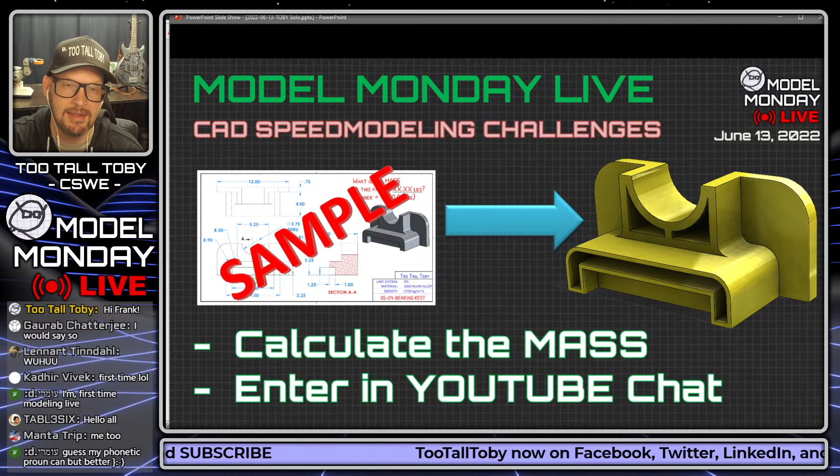I mean, the basic rules are that you can use any CAD package out there. As long as that CAD package can input density and give you a calculation for mass, you're good to go. You want to make sure that when you're doing these challenges, you use the specified precision that's on the prints. And the first person to enter their answer in the chat is declared the winner.

Now, as far as the material density goes, you'll notice here, these are the three materials we use, and these are the two different unit systems we use. So a lot of times I encourage people to grab a screen capture of this page, just kind of save it off as its own standalone JPEG, and that way you can get back to this in the future.

But really the best thing you can do is make sure you have these materials readily available with the appropriate densities. These are the default densities in the CAD system that I use. But if you're using something different, then you want to make sure that you have these material densities ready to go so that you can just immediately pick the material and begin modeling that design.

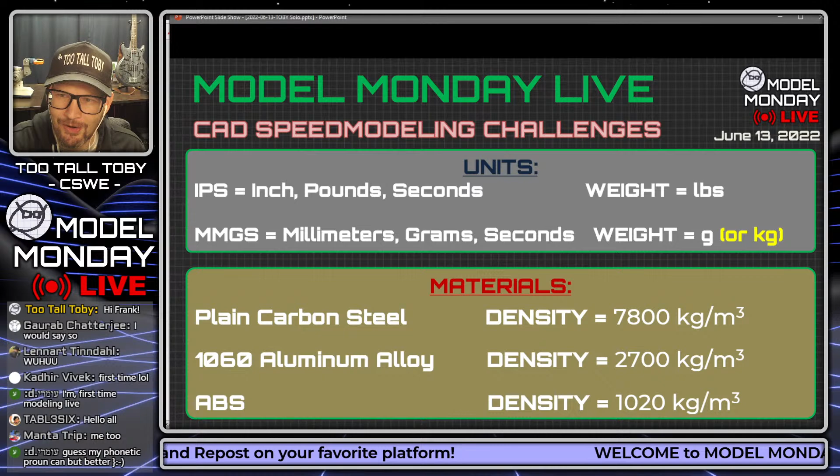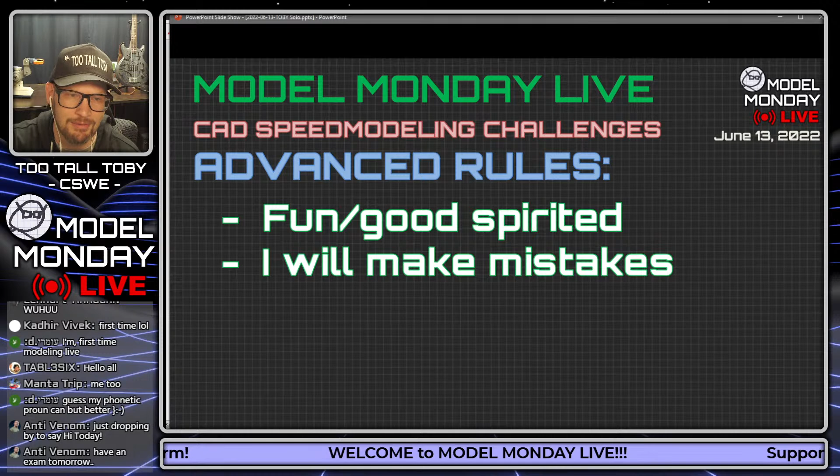As far as advanced rules go, it's really just a reminder that this is meant to be fun and good-spirited. And, of course, that along the way, occasionally I will make a mistake. I'll miss a dimension or something on the print. And if that happens, we'll just call an audible real quick and make sure that we get it resolved. And then finally, in the advanced rules, the Ivan exploit is permitted and is sometimes even encouraged, depending on the model. So we'll keep that in mind as we get into Challenge 1 here.

And so for Challenge 1, what I'm going to do is I'm going to show you this thing in full screen. So I'm going to flip over to a full screen view here. You're going to get your screen capture software ready, whether it's Windows Snipping Tool or Snagit or MW Snap or whatever you're using for screen capture. And as soon as I show this 2D print, we are live. We are going for it.

The challenge is live. And it's up to you guys to come up with the mass of this model. And the first person to do it wins. It's declared the winner. So here we go. In 3, 2, 1, go. So what is the mass of this part? In XXX grams. What is the mass of this part?

And you can see here that in the lower right in the title block, we're looking at this part using millimeters, grams for our measurements and our weight. Where material is ABS, which is a density of 1020 kilograms per cubic meter. And this model, this might be like a 3D printed model, some kind of a hex bracket.

You can see here the geometry, the dimensions on this thing. A little bit tricky. Not super tricky, I don't think, but a little bit tricky. Some things to look out for on this one. Make sure you take note of where your center points are for your different arcs relative to the overall center line of the model. That should definitely help keep you out of trouble a little bit as you're attempting to turn this 2D print into a 3D model.

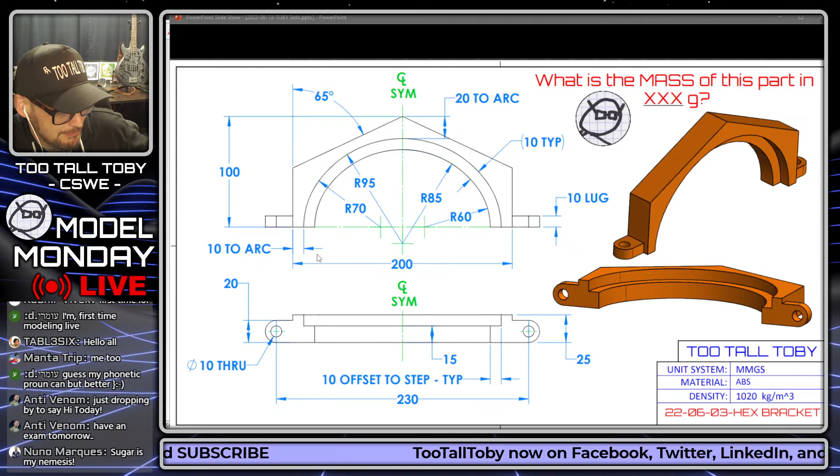It's probably not good that that's how I break my fast, with that sugar in the morning. But Nuno says sugar is my nemesis. Yes, I've fought many battles with sugar over the years, and I think nemesis is the perfect term for that. It's like we just keep going at it. Nobody really ever wins or loses. It's just an infinite battle between me and sugar.

All right guys, let's take a look at some Model Monday solved action here. What I mean is that we post these Model Monday episodes, these live episodes, and people get a chance to watch them afterwards. In this case, there was an episode a few weeks ago, Season 4, Episode 2. I'm going to go through and update all the thumbnails so they say the season and episode, just to make things a little easier when people are browsing.

In Season 4, Episode 2, there was a question that came in. This question actually looks like it came from Omri, who was in the chat today. They asked: is there a tutorial on how to solve the number 3 challenge? The angled side caused me so much trouble. And bro, I hear you on that one. I believe this is the right part - since you're in the chat here today, if this is not the part we're talking about, let me know. But I believe this is the part you were referring to.

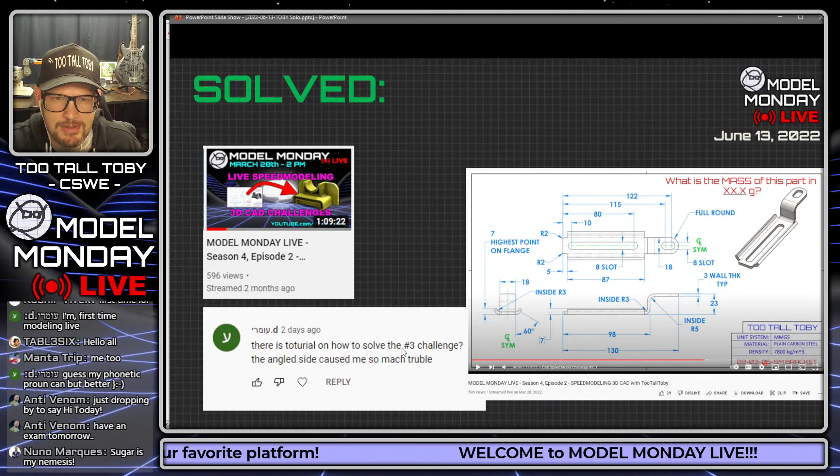That was a bit of a challenge. It could be a sheet metal challenge, it could be a non-sheet metal challenge. It's up to you how you want to tackle this thing. For some people it might be easier to do it not as sheet metal. But yeah, this is kind of a challenging model, so I figured what I could do here is jump over to our Model Monday solved mode, which means we'll be turning on the keyboard cam today.

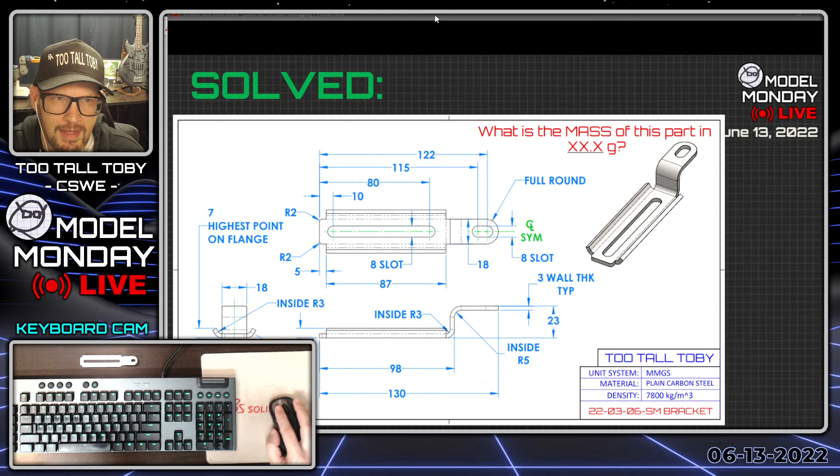You guys can get a look at this keyboard and mouse setup that I have - very high-tech and fancy. And we can talk a little bit about this sheet metal bracket, SM bracket, that we did a few weeks ago on Model Monday Live. So let me bring up our CAD program of choice today, SOLIDWORKS 2020. Let's get into this and see what it's like to take on a challenge like this model here, this sheet metal bracket looking model.

Just like what you guys do during the live stream, what I'll do is grab a screen capture of this - maybe the important stuff here, material density, and there we go. That looks pretty good. Then I'll move that over onto my second screen so I can continue to reference it as we're going through and creating this model here.

And then when it comes to the model itself, I think I'm going to do this as sheet metal. So I'm going to go new, and I'll pick a template that is in the correct unit system and with the correct materials.

So this is plain carbon steel.

When it comes to modeling a part like this—really when it comes to modeling any part, regardless of what CAD system you're working in—you have to come up with a plan to begin with. In this case, I think what I would do is choose to create this profile first: over, up, and over.

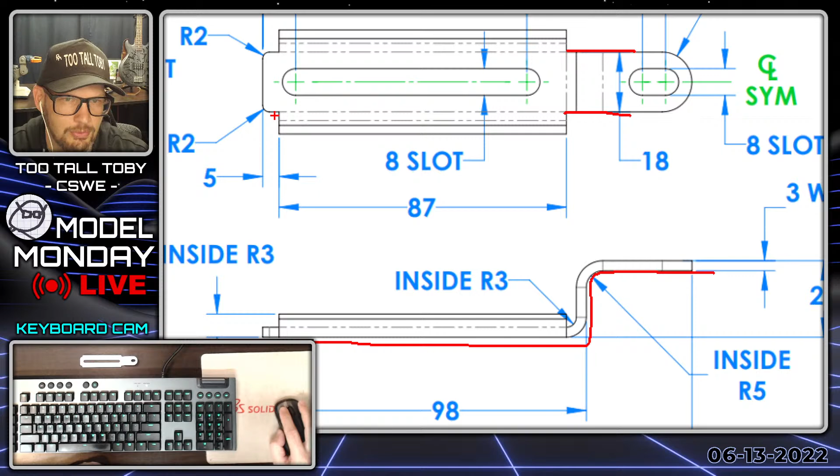When we're doing 3D CAD, it doesn't matter what CAD system you're in. You're always trying to come up with a couple of things right at the start of the design. Number one, what's the starting plane, starting profile going to be? And number two, which kind of goes hand in hand with that—

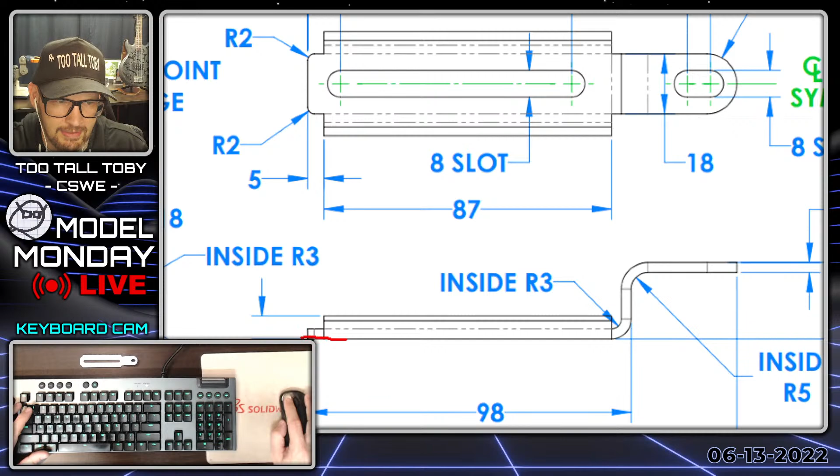What's the first feature going to look like? The base feature—like when I go from sketch to feature mode for the very first time, what am I going to end up with? In the case of this model, I'm going to end up with something that looks like these two views combined together. It's going to come over, up, over as my sketch, and then I'm going to use that to create this geometry. It'll be straight, but it'll be this geometry here. That's going to be what my first feature looks like.

So that means my starting plane is going to be the center plane running through that model—basically this plane here. We always want to ask ourselves, where are we going to start our very first sketch? What's our first sketch going to look like? What's our first feature going to look like after we take that sketch and turn it into a solid feature?

Sometimes it's a loft, sometimes it's a sweep, sometimes it's sheet metal. We have to use our best judgment and our experience in CAD to determine what that's going to be. But that's always the first thing you want to think about: what's my starting plane and my starting profile? Those two things go hand in hand, right?

Because you're going to create your starting profile, which is your first sketch, on your starting plane. What the starting plane also helps you establish is how the model is going to be located relative to the origin. And it leads you into the next question: does the model have symmetry?

Because if the model has symmetry, that really helps you figure out where the first sketch should be located—right in the middle of the part. It can also save you time, because if you can just model half of the model and then mirror it at the end, that's going to save you a lot of time. These are all things we think about, and again, it doesn't matter what CAD system you're working in. I'm working in SolidWorks today, but these same tips and tricks are applicable to all CAD systems.

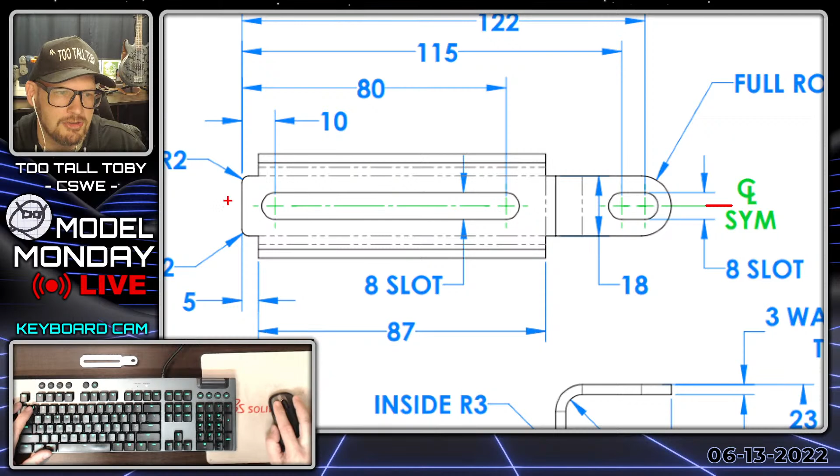So: starting plane, starting profile, is the model symmetric? A lot of times on the drawing it'll tell you it's symmetric. Even if the model isn't fully symmetric, a lot of times you can see there's partial symmetry to a certain point in the feature tree. So you know you can model half of it, mirror it, and then make additional changes that turn the model into an asymmetric challenge. But maybe it starts out symmetric, so you can save time—or at least intelligently decide where your origin is going to be. In this case, I'll probably put my origin here.

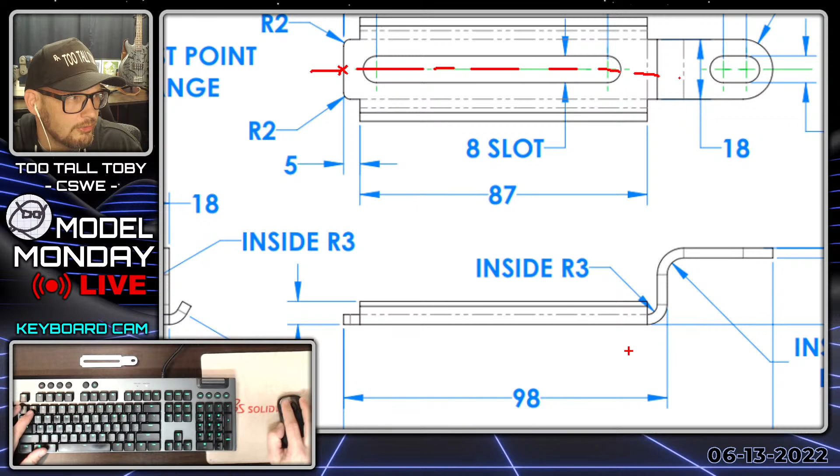It's definitely going to be along this center line here. I don't know if it's necessary that it's there, or it could be, so in this case, that's going to leave my origin down here in this corner. Could also maybe be up here in this location.

Usually what I try to do is have everything going to one side of the top plane if the model's not symmetric about the top plane. That's probably why I would opt for that location instead of this location. But there may be other questions that come into play when you're deciding where your origin is. Those are the things I think about when I'm going to get started with a design.

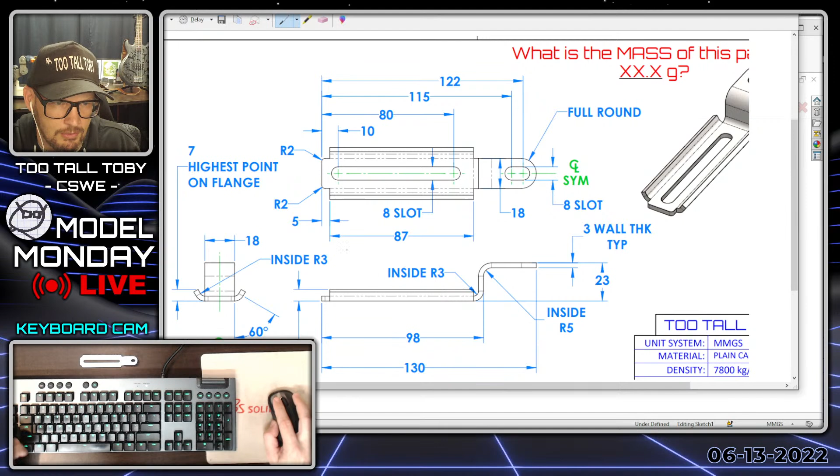I think I've talked enough about that, so let's get into it here. I'm going to go to the right plane because a lot of times I just try to model the same way that it's drawn. So it looks like in this case the drawing has the geometry that I've already identified as the starting geometry, meaning this geometry here. This looks like it's on the right plane, so right.

This over here is going to be the front, and then the top up here. All right, so that's how I'm going to start out. So now I know my starting profile, and my starting plane. I was trying to say starting location, I think, and I combined the two.

So now I'm going to utilize auto dimensioning. As soon as I begin sketching, I can immediately enter a dimension, and now that geometry is fully defined. I'm going to create some additional auto dimensioning here. So this is 23 to the top, and the wall thickness is 3.

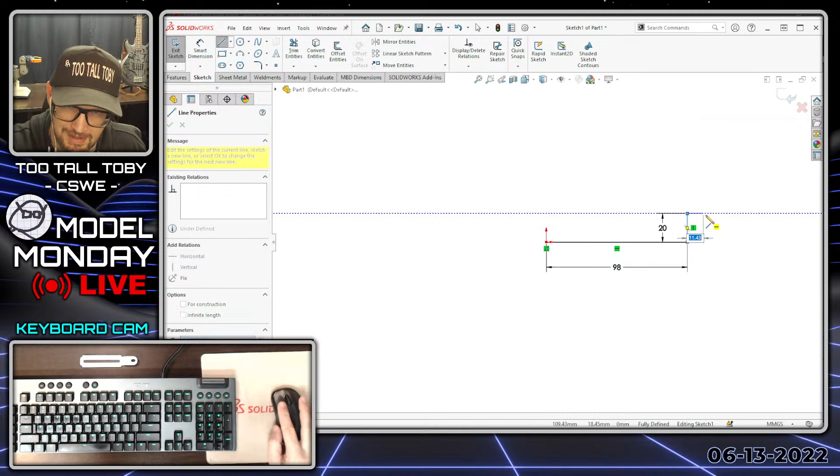So I could type in 23 minus 3, or I could just do it in my head. I can actually figure that one out in my head, no problem. Very proud of my math skills today. So I'm going to go here to this final dimension, and we're going to make that 130.

And that's how we create the geometry for this first setup here. So you can see it comes over 98, it goes up, comes over, this is our 130, and then this is our 23 minus 3, because that 23 is going to the very top.

Okay, so now let's turn that into a sheet metal feature. So we go features, and we go sheet metal. These tabs up top here, we go sheet metal, base flange tab, and we're ready to turn this thing into a sheet metal design.

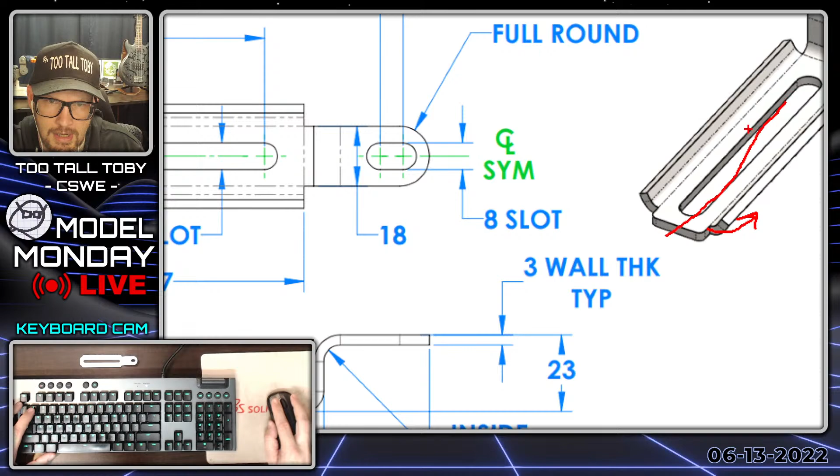In this case, because the model is symmetric, and because it's got this kind of funky flange sticking out here that I really don't know how I'm going to handle yet, I just know that it's going to be tricky. Because of those two reasons, I think what I'm going to do is choose to just model half of it, and then I'll mirror it over to this side when I'm done.

So that means I'm going to take my 18 dimension that I identified earlier, and I'm going to cut that in half. You can do that right in this dialog box here — you can go 18 over 2. That way, if you can't figure that out on your own, you can just let the software do it for you.

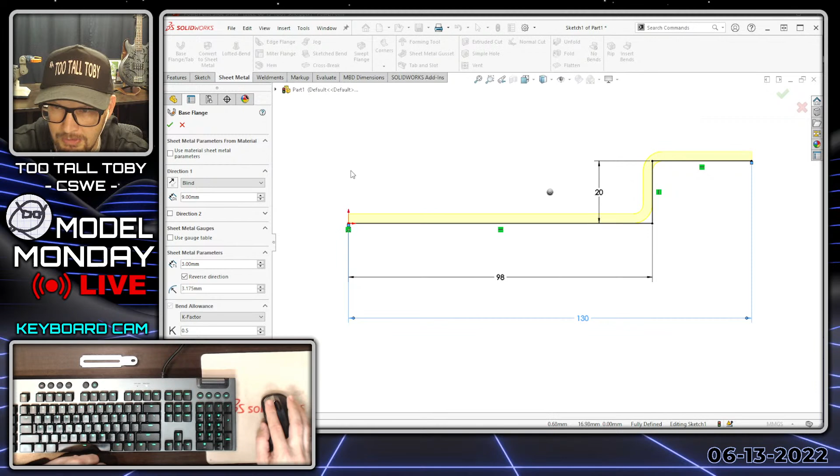Now, this is kind of like a thin feature in the sense that it's not extruding as a thick model, but I need to declare what the wall thickness is. So the wall thickness here is going to be 3 millimeters, and it's going to be on the other side of the design because of the drawing. Because, like I said earlier, a lot of times I like, for consistency, to have everything on one side of the origin, at least in the beginning.

And then it looks like the bend radius is 3 everywhere except for one spot. This is kind of a weird scenario here. I wanted to show you guys that I have the physical part, but you can see that we've got a bend radius here of 3 and then a bend radius of 5.

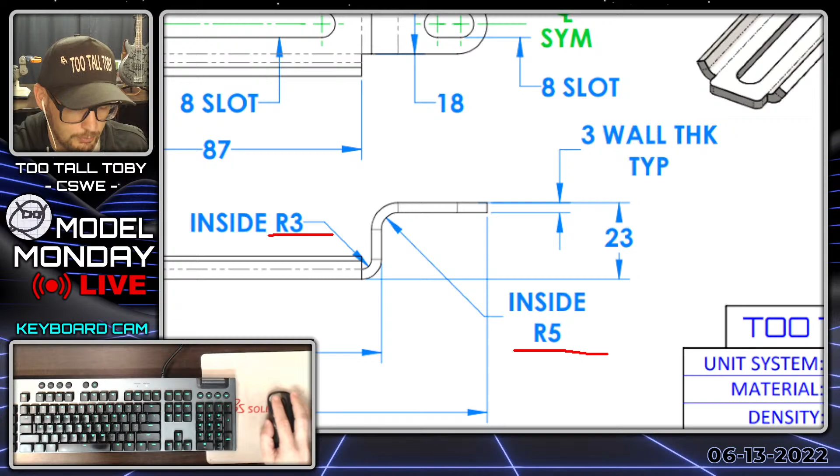I'll hold this up to the keyboard cam a little bit so you can see it... oops, sorry guys, I forget that the camera's a little weird. But it does have this wall — this radius here is like greater than the other radius. So let me switch back to my regular webcam. There we go.

See, there's a pretty obvious difference between those two radii—one's much larger than the other. I thought that was kind of unusual. You don't usually see that in sheet metal; it's usually pretty consistent, but this model was a little unique, and that's part of why I thought it would be a good example here.

So I'm going to set the default bend radius to 3 here and hit the green check mark, then immediately go into that base flange, and notice there are 2 different bends that were created when I made that base flange.

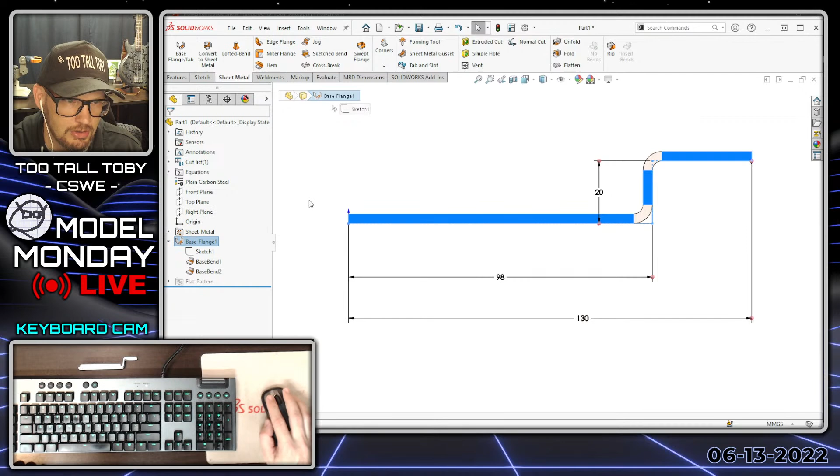In SolidWorks, you can actually modify the radius for any bend created when you make a sheet metal feature. So I can go to this bend here and select edit feature.

Then I can say I don't want to use the default bend radius, and change it to 5. So I found the bend in the feature, unchecked this box, and input my new value for the bend radius. That's how you do that.

We hit the green check mark, and now if we click on this face here and look down in the status bar, we can see that the radius of that bend is now 5 millimeters. That's excellent, that's what we wanted.

For a quick sanity check, we can pick on this other face, and see that the radius of that bend is 3 millimeters. So, we got what we wanted there—non-uniform bend radii in a sheet metal challenge. Good stuff.

Now as far as this rear section goes, we've got a full round here on the very rear. I'll probably end up saving that for the end of the model after I do the mirror, because it's easy to rip in a full round fillet if you have all 3 faces.

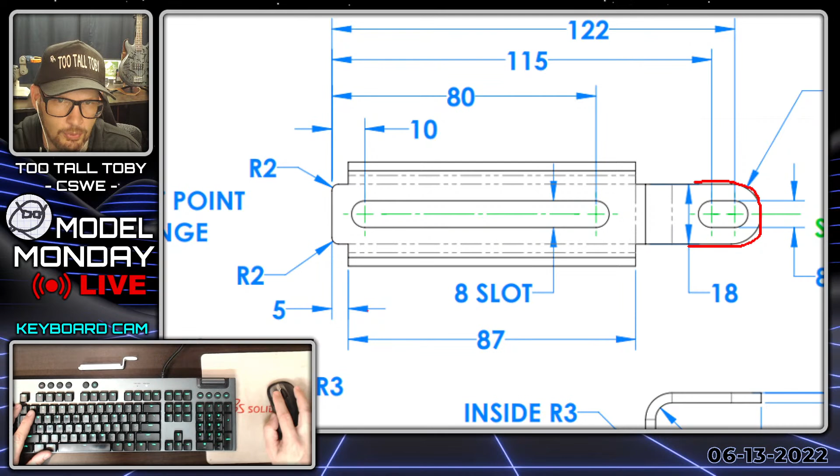Right now we only have 2, because the model's cut in half, so I'll save that full round for the end.

And the slot—a lot of times I save my cut extrudes for the end as well. This is just establishing a consistent workflow. When you're working in 3D CAD, you want to get in the habit of doing things the same way over and over again.

Don't just randomly do things—it'll make it much easier for you and your coworkers to visualize and edit your models if they get your models. So I'm going to save those cut extrudes for the end.

So I guess that means I'm basically ready now to move on to this kind of weird section here, where we're trying to create this bend that comes up at an angle, going up to 7 millimeters at the highest point. It's a very strange way of defining a sheet metal design, or really any design.

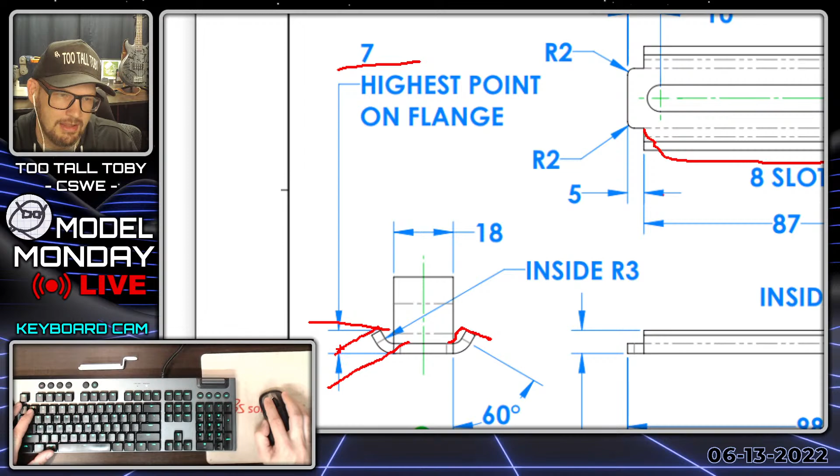You wouldn't normally see that—usually you'd see more of a flange length, but it's what the customer needs, and what the customer needs is what we try to provide. That's why we do these things.

So let's get in here now. We're going to create an edge flange, and whenever you do an edge flange in SolidWorks, there's some important information you need to know about. I click edge flange here, and the first thing that's very important to know about is the idea of what's called flange position.

This is down here in the flange definition. You come down to the flange definition section, and there's a part that says flange position. There are mainly 3 different flange positions.

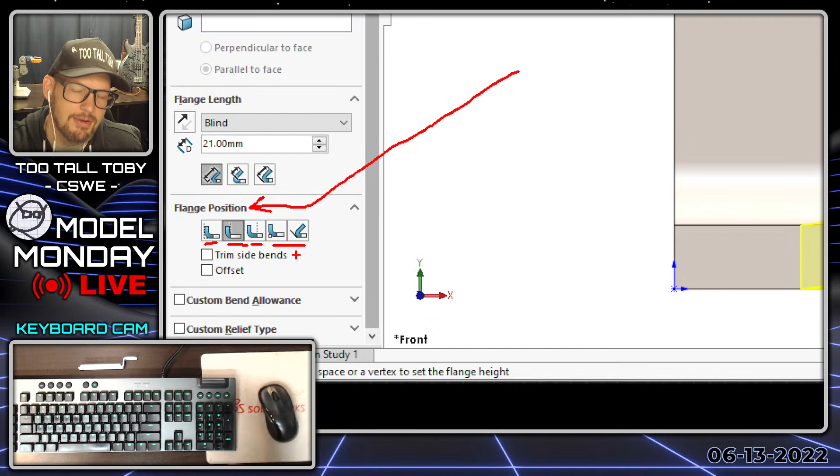There are 2 more on the end here, but they're not as important unless you're doing non-90 degree bends. Now, I realize we are doing a non-90 degree bend here, but for today's example, let's just ignore these last 2.

Let's just focus on these first 3, because these are the more common cases you run into. And what we've got here, you can actually kind of see it in the illustration of the icon.

We've got this guy here, which means bend the material so that it is inside—so it's the same location as the original material from the solid flange that you're creating the edge flange coming off of.

So here's what I mean by that. If we look at this model and go to this first option, we can see that the original solid geometry came over and came up here, and the edge flange is right up against that—nice and flush right up against that.

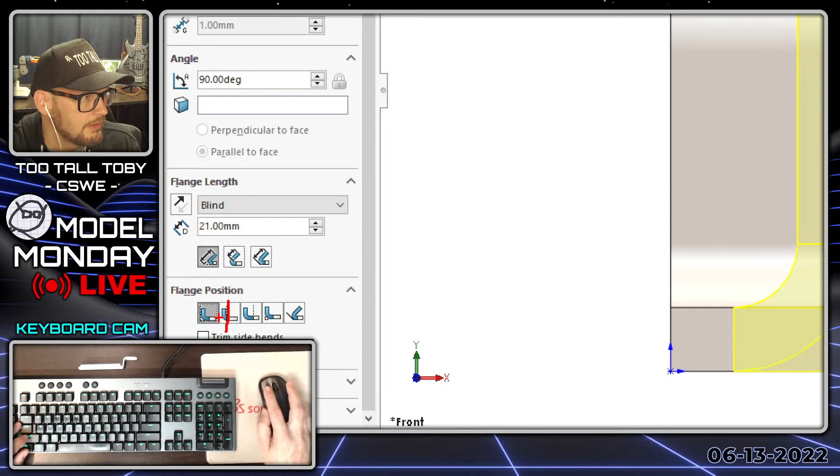The second button here means that we're still looking for where that original geometry is, but this time we're going to put 1 material thickness to the outside. So if I choose that second button, you can see what the result is here. We get 1 material thickness to the outside. And then the third button, I'm just going to minimize the flange parameter so you can see how it changes.

What the third button does is it bends the flange beginning at a tangency point, which is exactly where the existing solid material is. So depending on how the print is dimensioned, or depending what the customer gave to you, you have to figure out what the appropriate flange position is. And it kind of depends on what you're building.

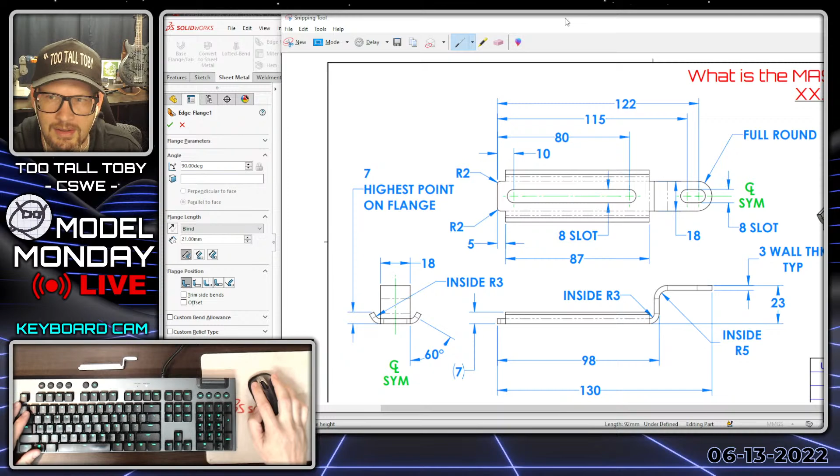Like if you're building an electronics enclosure, a lot of times you get the overall dimensions instead of the inside material dimensions or anything like that. So it just kind of depends on the market that you're in and who created the drawing. There's a lot of things that it depends on. But in our case, we can see here that the view from the front is showing that the flanges are starting where the existing material ends.

So we're going to choose that third option because that's what the customer gave us, and we can see that now the flange begins here where the material ends. It's exactly what we want. And then in the flange command itself, you do have the ability to specify an angle. So we could say that we want to specify an angle here of 60 degrees.

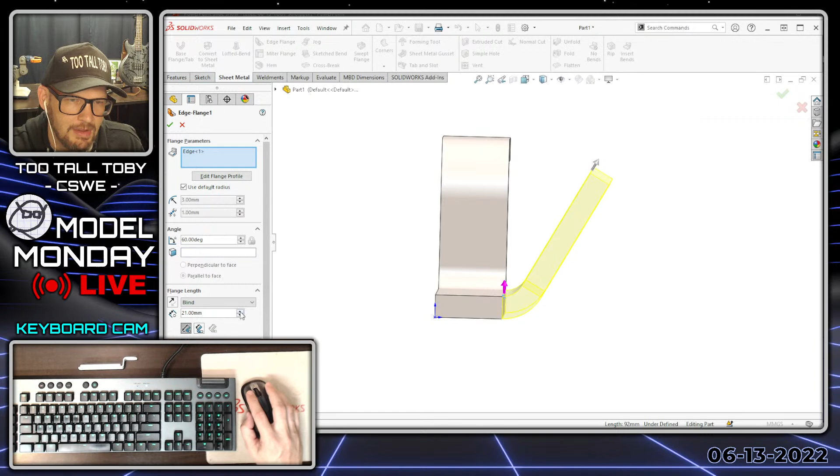Okay, so that's what the customer is giving us, that angle at 60 degrees. So we're going to specify that same angle here on our flange. Now the final challenge is trying to figure out how to end the flange. There are some clever ways of saying we want this length to be a certain distance from the original location. But unfortunately, it doesn't really seem like any of those options are going to help us in what we're doing here.

So I think in this spot, I might just opt to do it with two different features. So I might just opt to create the flange that's sticking out there a very long distance. There's a lot of different ways you could do this cut, right? But I might do something like convert, and then just pull this endpoint off here, create another line here, which is perpendicular, and then just merge these points together.

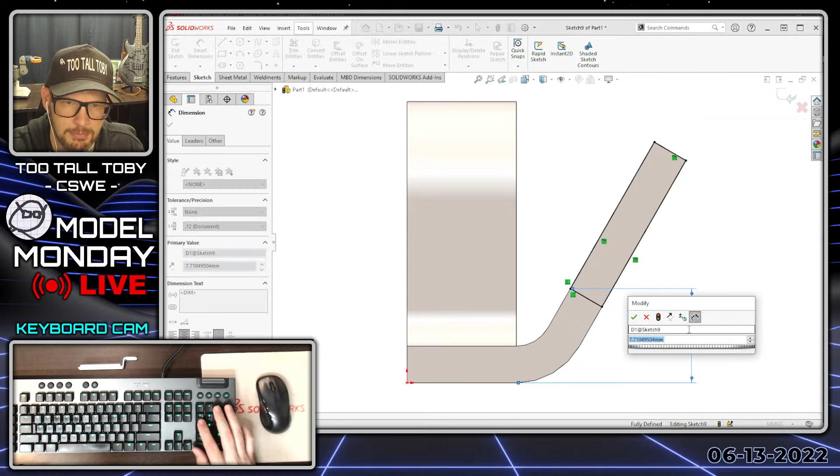And so what that lets me do is very easily implement the customer's design intent, the 7 millimeters to the highest possible point, without having to come up with some weird solution using offset from a point or anything like that. If you just go in there and do it with brute force, you can still create a model that's resilient, a model that's going to stand up to changes. And you can see here that gives us exactly what the customer's asking for.

So now I'm going to do S key Extruded Cut. This option here for normal cut probably doesn't matter if you have it turned on or off. Let's see if it gives me any flack if I turn it either way. Yeah, it doesn't matter in this case. It's a way of making sure that when you create that cut, you always get your geometry perpendicular to the material so that you can just do a normal punch through the material in the flat. A little bit advanced, it's kind of a sheet metal subject.

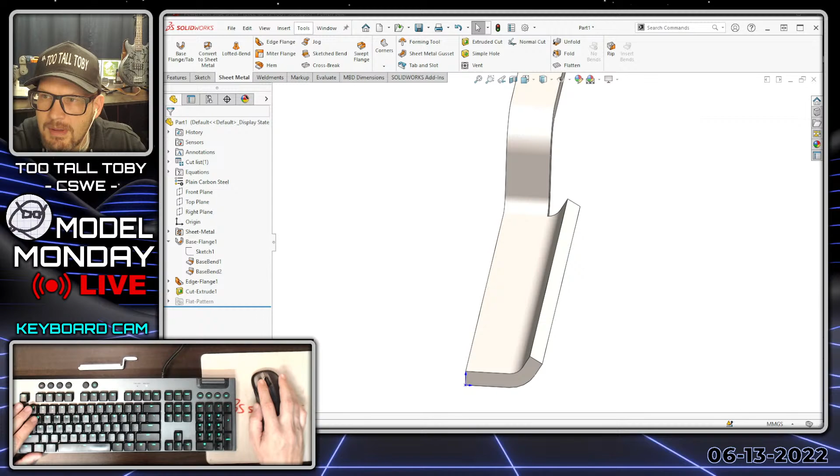And then I did miss one thing. I didn't want to talk about too many things at once, but the other thing that we need to do here is create a modification to the flange so that the flange doesn't go the full length, right? We end up 5 millimeters here in front of the flange when we're creating that flange geometry. So no problem. We'll just go edit feature here on the flange.

We'll say edit flange profile, and we can actually just grab this leg here and drag it in a little bit, and then say that we want that to come in 5 millimeters. And then as far as creating your models so that they can withstand changes, maybe you'd want to put a dimension on here. Let's say we want to make that dimension 25 millimeters just so that we know that it's enough.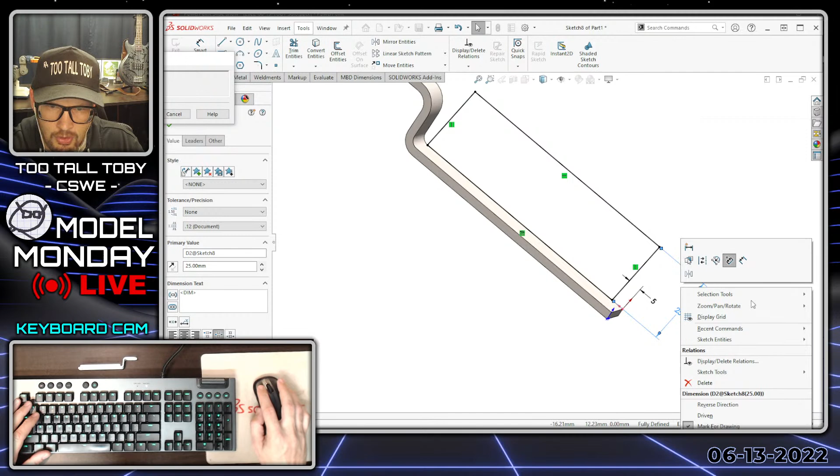And then there's a little trick here in SolidWorks. If you ever do create what I call a dummy dimension, a dimension that's really not going to do anything, you can right mouse button on that dimension, and from the right mouse button you can say mark for drawing. So it's this. Well, it's down towards the bottom here. Let me move this up so you can see it. So right mouse button and then mark for drawing. And it's always checked on by default.

If you uncheck it, that dimension actually takes on a new color. It becomes kind of like purple. And that means that when you bring your dimensions into your drawing, that dimension won't come in with all your other dimensions. So a lot of times I'll do that. Sometimes I'll actually type in a little note here to myself, like dummy dimension, just so that I know that that's not really a dimension that's coming from the customer or even really doing anything. It's just meant to push this edge out far enough that I can cut it and I won't run into any problems later.

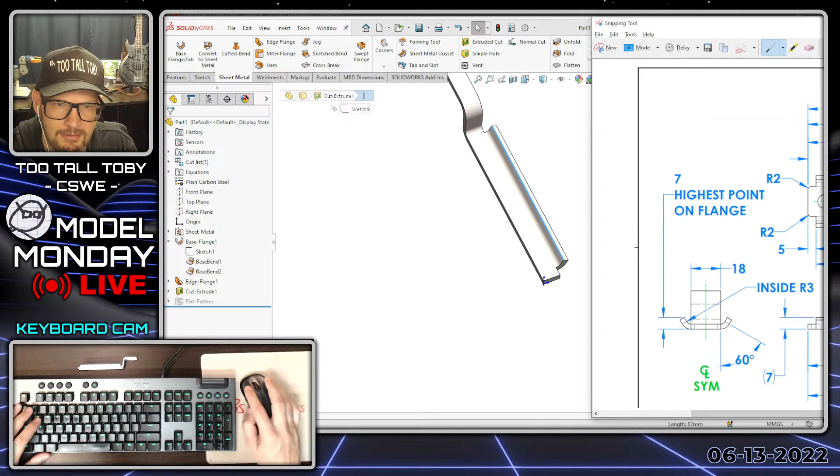All right, cool. So that looks like it worked out pretty good. It looks like maybe there's one other potential area that I should look at, which is this dimension here. The length of that needs to be 87. I can see it there on the print, that 87. So I'll just click on the edge and then look down here, and then I can see, yep, 87. So we're good there. Don't have to take a lot of time. Just utilize your status bar.

So a couple of final features here. I'll go fillet. I'll say I want to fillet this at a radius of 2 millimeters. I will choose to mirror this geometry. So I'll go features, mirror. This is going to be a mirror about this centered face here. It's going to be a mirror of a body. This is what you want to do, especially with sheet metal. Kind of want to do this in general, but especially with sheet metal.

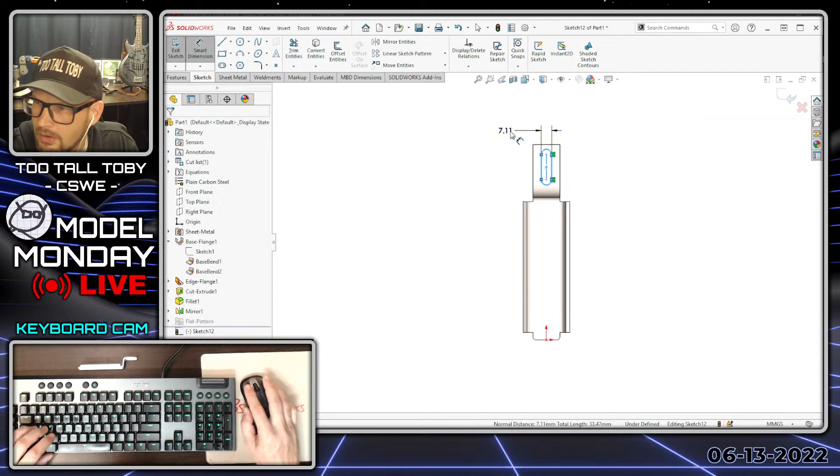I'll go top face, begin a sketch, orient my view, and create a slot here that's aligned with the center of my model. This slot is going to have a width here of 8 millimeters, and then some dimensions from the origin. This is another cool thing you can do: when you're planning on where your origin is, take a minute and look at where the dimensions are on the print. Sometimes you can save yourself a lot of time because the dimensions on the print are all coming from the same spot. So similarly, we'll create a slot here running up through the middle of this part.

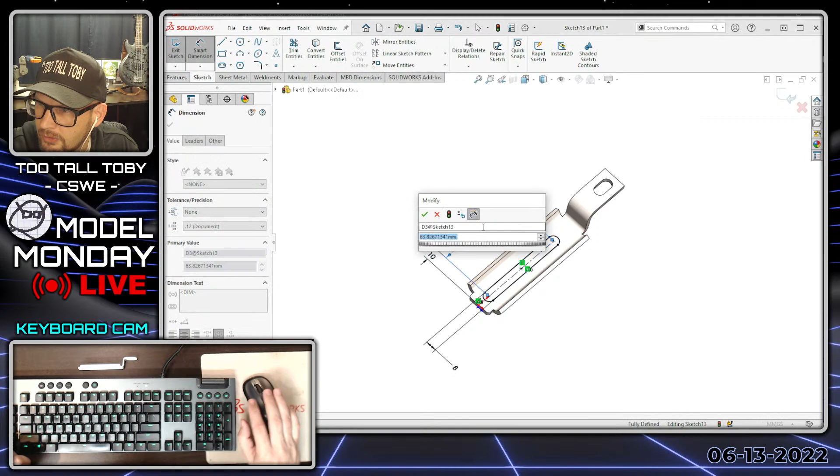We'll say that we want that to be, this is 8 millimeters as well. Could have done them both in the same feature. Some of you might be wondering, why not just make them both in the same feature? And the answer is because there may come a time where the customer only wants one of these, and I just want to make it a little bit easier for me to adjust if the customer decides that they say, I don't want that one anymore. I know you could always do a delete face or edit the sketch, but I just think that makes it a little bit easier.

And then the final feature here is going to be fillet, full round, and we're going to say this face, right mouse button to advance to the next box, this face, right mouse button, this face, right mouse button to finish. And there is our sheet metal part.

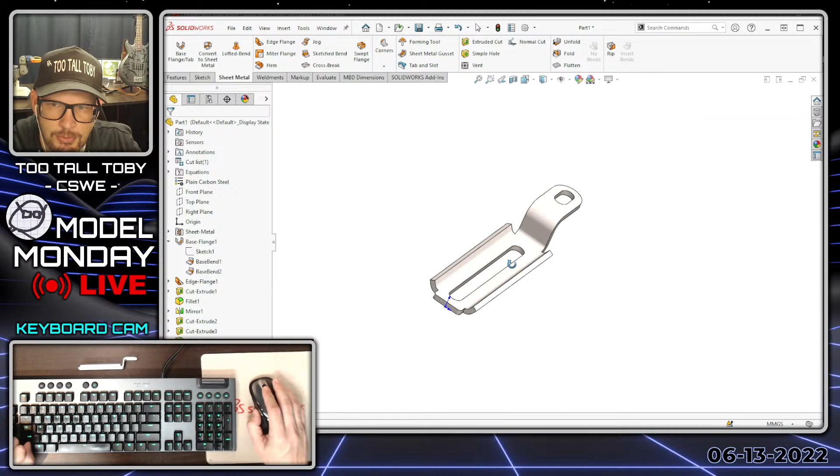And so, Omri, I hope that that was helpful to get that model modeled up there. I know you were doing the challenge when I did that, so feel free to go back and watch the recording after we're done live here today. But cool. And Jed in the chat says, nice tutorial. I struggle with that part. All right, awesome, good. Well, I'm glad that that's helpful for you as well, Jed. And as always, I appreciate that feedback.

So let's go back to our challenge here that we put out for the chat today. Let's see if the chat was able to come up with the correct answer. So I'm just going to bring up the print here once again. I'm going to turn on the chat so we can see what I'm looking at. Little Toby view here of the chat, and we're going to roll back a little bit, and we're going to see here that the very first answer that came in was from Gaurab, and he said 160.07.

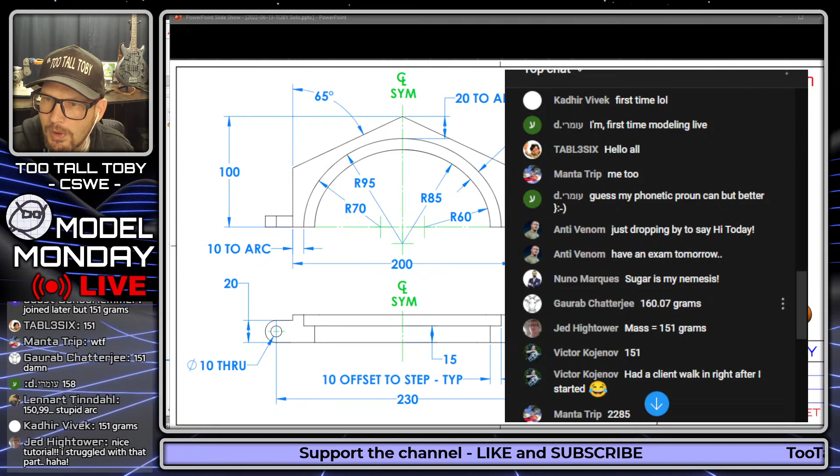Nicely done, Gaurab. And Jed came in with 151. Victor coming in here with 151 as well. Manta Trip coming in with 2285 and then modified 228.5. Nicely done. Bjorn coming in here with 150.99. Lennart Tinndahl coming in 149.52. Nicely done, Lennart. Let's see here.

We got Gaurab coming in 156. We got TABL3SIX 148. Ryan M coming in 148. We got Joost. Says join later, but 151 grams. Nicely done. TABL3SIX revising to 151.

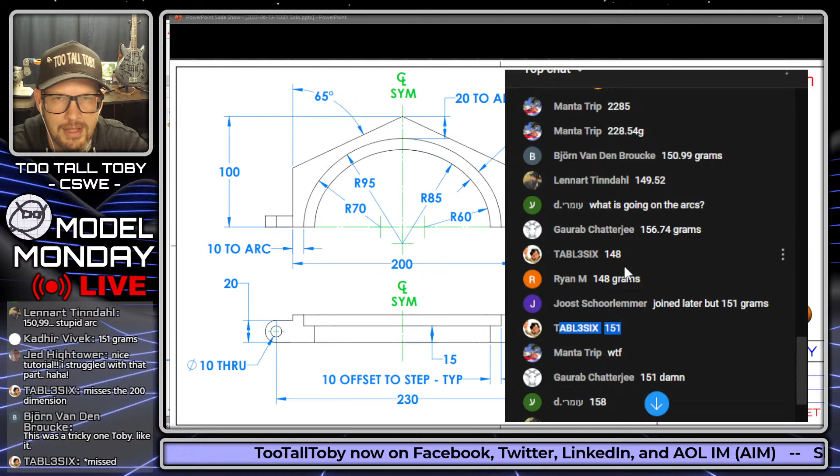Yeah, if you guys are here for the first time, just know that there's no problem if you need to revise your answer. If you're looking at it and you're thinking, like, what did I miss? Something's off here. Why am I not getting this right? Feel free to revise. Manta Trip says, WTF. I'm looking at all these answers, and they're all coming up with something different than me. What am I missing? Gaurab coming in 151.

Nicely done. Omri coming in 158. Lennart coming in 150.99. Says, stupid arc. Kadhir comes in 151. Let's see here. TABL3SIX misses the 200 dimension. All right. Bjorn says that was tricky one, Toby. I like it. Nice. And TABL3SIX, yep, missed one of the dimensions. All right. Awesome.

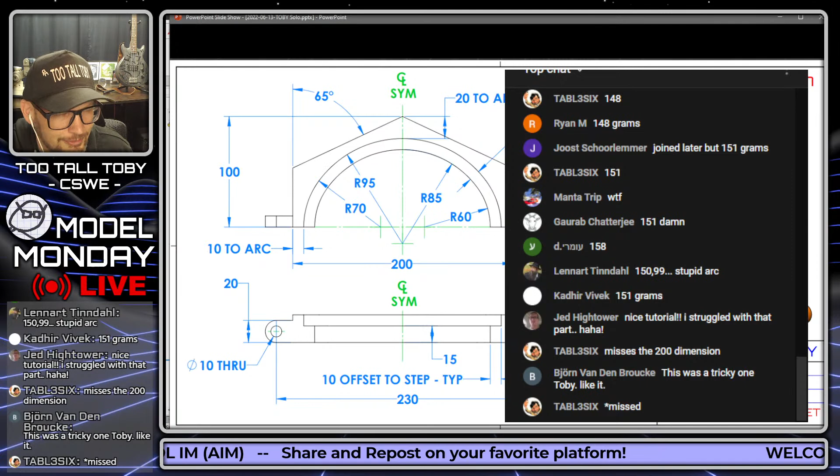Cool, guys. Well, let's see what the correct answer is. So the correct answer for this challenge is 151 grams. 151 grams was correct. So it looks like the first person who came in there with 151 was none other than Jed Hightower. Nicely done, Jed. If you guys want to give Jed a GG in the chat, be sure to say, good game, Jed. Nicely done. Well done. GG. And Jed was the first one to get it. But everybody who got it and everybody who even took the challenge, congratulations. Well done.

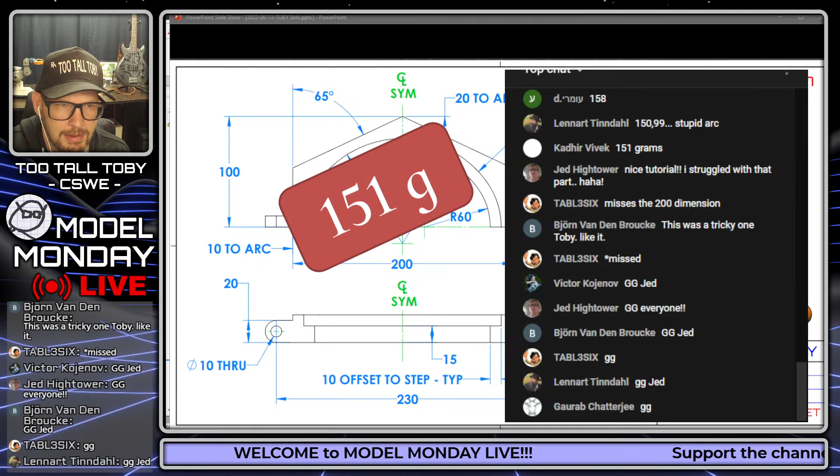And let's get on to another one here. I'm going to take another quick sip of my coffee, and then I think we'll be ready to move on to the next one. Congratulations to everybody who got it right. Congratulations to everybody who tried it. And if you did try it and get it wrong, of course, you can always go back and try it again. And as always, if you guys have questions about these, just let me know, and I'll be happy to do some more Model Monday solved.

Here we go, guys. Challenge number 2. Get your pencils ready. Get your screen capture software ready. We're going to go live here in 3, 2, 1, go. Jed says, first time win. Congratulations, bro. Here we go.

What is the mass of this part in XXX grams? Note, in the black and white views, the line views, the fillets are hidden for clarity. You can see the fillets are listed there. True radius, 6 millimeter radius at 16 places. Hopefully you can figure out where they are between those different views. It's pretty obvious where they are. This is in millimeters. It's plain carbon steel with a density of 7,800 kilograms per cubic meter. You can see that down in the title block. The location of both the hexes and the circular bosses is along that 100 millimeter diameter circle.

And looks like I did miss a dimension here. I'm just noticing it. It's not a huge deal. I think it's pretty obvious, but I'm going to zoom in on this part just for a second. I have the 10 millimeters listed here. Oh, it's not zooming in. You know what? The 10 millimeters that's listed as the width of the leg going out to the four arms, that's centered as well. Everything's centered in this thing. I mean, that's really the long and the short of it.

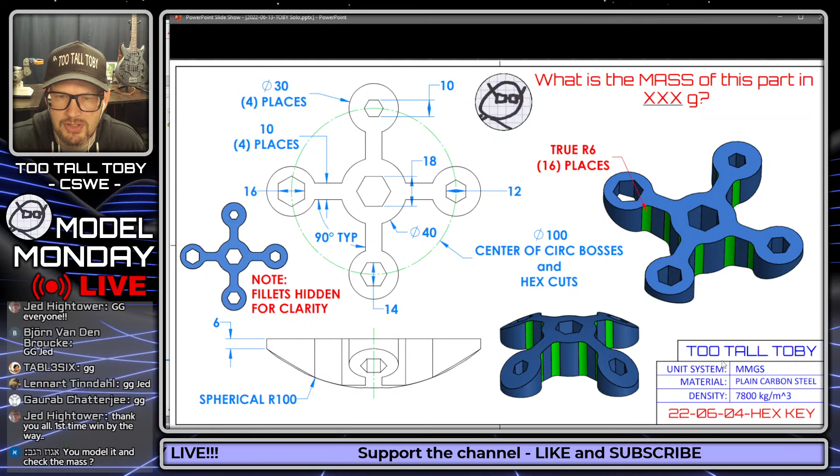Let's see here. You model it and check the mass. Yep, that's it. You model it and you check the mass. So you try to take this, turn it into a 3D model, and then you come up with the mass and you enter that mass into the chat, and then if you get it right, you're the winner. You're the big winner.

Yep, no problem. Thanks for that question. If you tell me how to say your name, I'll say your name as well. All right, here we go.

Gaurab says, man, should have went slower, just kept missing dimensions. Yep, we've all been there, no worries on that one as well. And let's see here, all right cool, I think we got everybody here. Victor also forgot the fillets. Forgot the fillets, yeah, been there.

All right, let's see what we got here as far as our answers that came in. So I saw Juiced here came in 625 grams, all in caps. I love it, it's perfect. Tim Z 657.7, a little bit different answer. Victor coming in 617, another slightly different answer. Gaurab coming in here 638.24. MLC CAD coming in 625. We got Jed Hightower coming in with 761, a little bit higher than some of the other people.

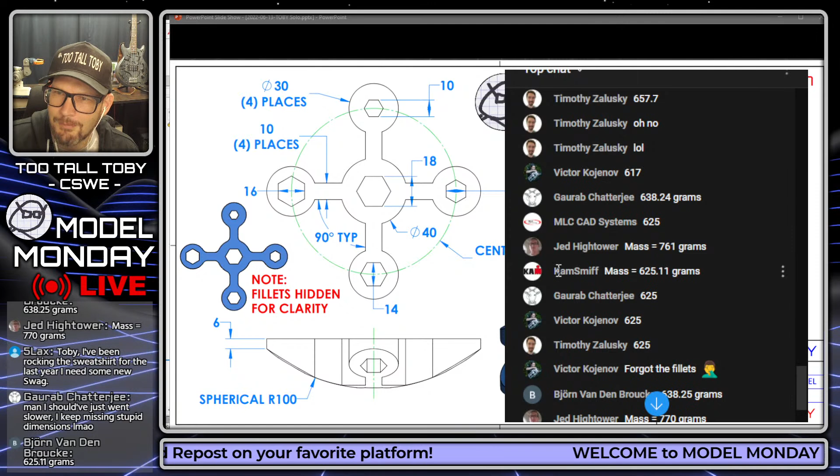Sorry guys, couldn't resist. Let's see here. We got Kam Smiff, what's up Cam, how you doing? Former Model Mania champion, former champion on TooTallToby tournament. 625. Gaurab revising to 625. Victor revising to 625. Tim Z revising to 625. Bjorn coming in here at 638. Jed sticking with his, he's even going up even higher there, 761? No, 770, going up even higher. All right, and Bjorn revising here to 625. And TABL3SIX coming in at 690.

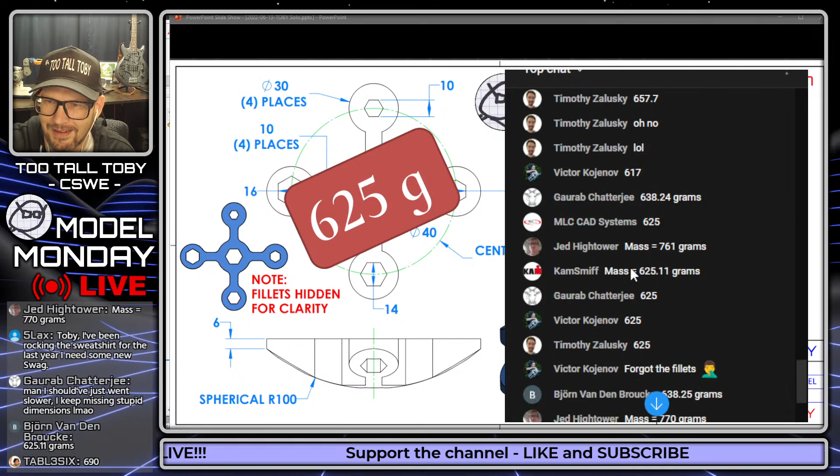So let's see here, what is the correct answer on this one? The correct answer is 625 grams. So very nicely done to Juiced. I think that was within like 5 minutes of me posting the image. So very nicely done, very fast. Well done, well done. Congratulations to Juiced. If everybody could please give Juiced a GG, a good game in the chat. Very nicely done, congratulations Juiced.

Very nicely done. Alrighty, and while you guys are coming up with those GGs in the chat, I'm going to flip over to full screen, and we're going to do our third challenge today. We're doing 3 challenges today, because it's Monday.

Victor asks, variable pattern? Yeah, there was a few different ways to handle that one. Variable pattern, move face. I did it originally with move face, and then the second time I just did it with one big clunky sketch, and that was way faster.

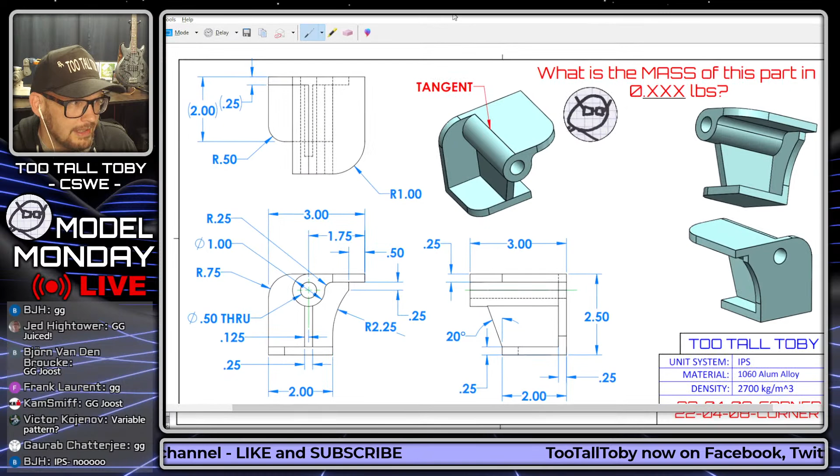And the first model that we did, I really explained everything, went into detail. This one I'm going to go just a bit faster. But I wanted you to see what I'm thinking as I go through and work on a model. These are the thoughts that go through my head, and it always starts out with the same idea. It doesn't matter what CAD system you're in, it should always start with this idea.

If I'm going to create a model like this, if a customer has this, or it's a napkin sketch, it's a part that goes between two other parts, so we have to create that bridge between those two parts. A lot of times you and your boss, your coworkers, kind of napkin sketch something out. Like if it's got the circular hole up in the top, it's got the angle there, it's got to have that fillet because it needs to clear those other parts that are in the machine already. Whatever it is, you kind of napkin sketch something out, and then you have to draw it. So you have to decide where you're going to start with that design, where the origin is going to be, what makes the most sense.

So I think for this model, looking over this whole model, a lot of times I'll end up looking at the 3D view, but then I also look at the 2D views. It's going to maybe be this shape here, either from the side or from the top. That might be my starting profile, and maybe I'll just drop my origin down here because I have the 2.5, I have the 2.

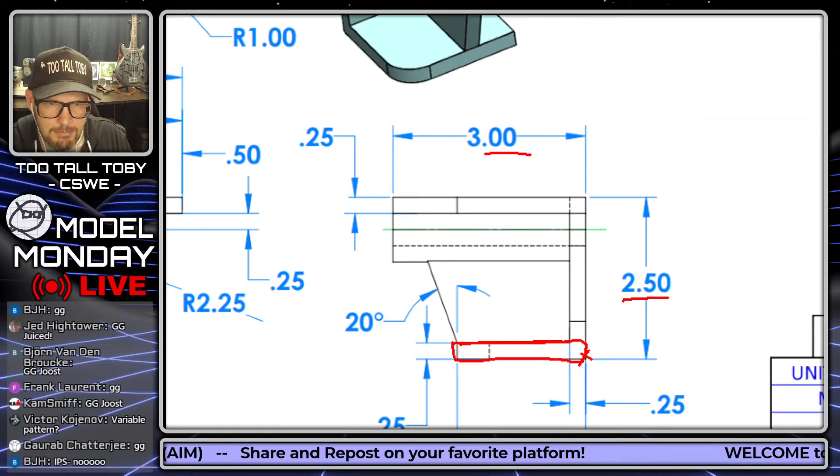It looks like a lot of dimensions come from that location, so maybe it makes sense for that to be my starting profile. Maybe I could even make this whole L shape here as my starting profile. Let's say I did that—you want to think through this as a thought experiment.

Let's say I did make that entire L shape as my starting profile. Where's the origin going to be on this plane? There's part of me that wants the origin to either be here, down in a corner, or maybe here, since this rib is centered and this hole is acting like an anchor point. Maybe it makes sense for the origin to be located there.

So what does that mean for the rest of the design? I guess that means I would go maybe 1.75 in this direction, and then 1.25 in this direction. So if I make that L shape, that's how I end up extruding it in the two different directions.

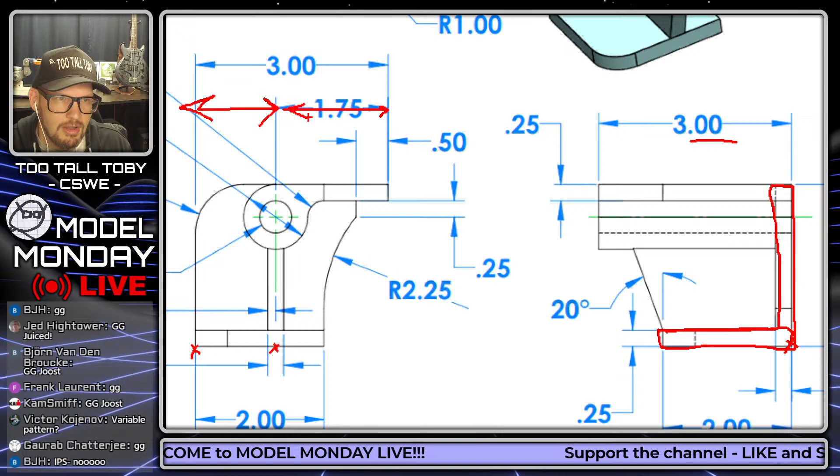These are things you start to get very comfortable with over time. It almost becomes second nature, where you don't even consciously have to think about it—you just jump in and start modeling. But when you're getting started in any 3D CAD system, you want to follow through this workflow and come up with a methodology that's going to help you create your geometry in a way that's reliable, consistent, and fast.

So for this model, if you're watching the recording, maybe take a screenshot so you can see what it looks like here. Let me get into it—I'm going to try to create this model while the chat comes up with their answers for that other model.

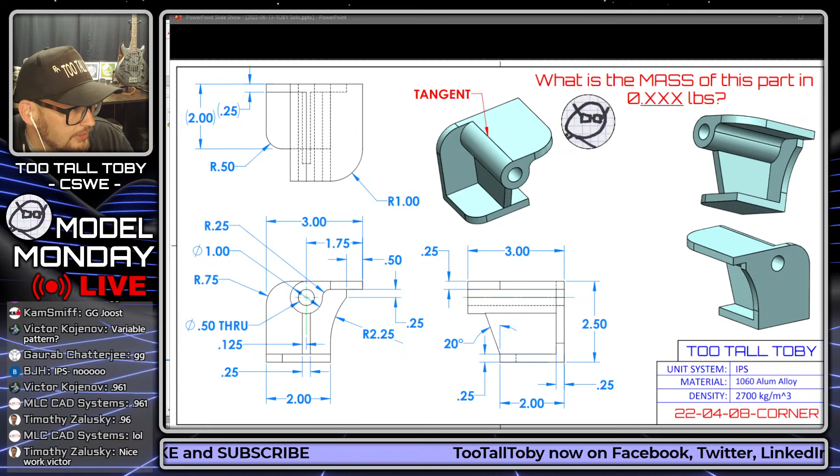I see the chat's already coming in pretty fast here, so that's impressive. It looks like I'm racing against the chat now. All right, let's take a look here—3, 2, 1, go.

So like I said, I'd start out my new part, pick the appropriate units, pick the appropriate materials. So this is in IPS and 1060 alloy. I can see the material here in the tree, and I can check that the material density is correct at 2700. Okay, good, I got the correct material.

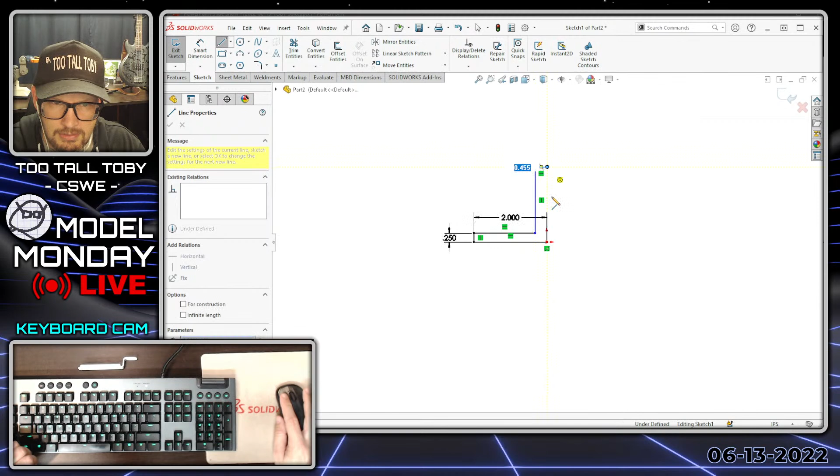Now I'm going to go to right side view, begin to sketch, orient my view, and create that L shape. So this comes over 2 inches, goes up 0.25, comes back in this direction some amount—it's not actually defined from that direction yet, so I'll double back and add those extra dimensions in a moment. This is defined as a wall thickness of 0.25.

This is going to be defined as a height of 2.5 total. S key, extrude. Direction 1 is going to be 1.75, and direction 2 is going to be 3 minus 1.75, or 1.25 as I mentioned before. So that gives me that initial shape.

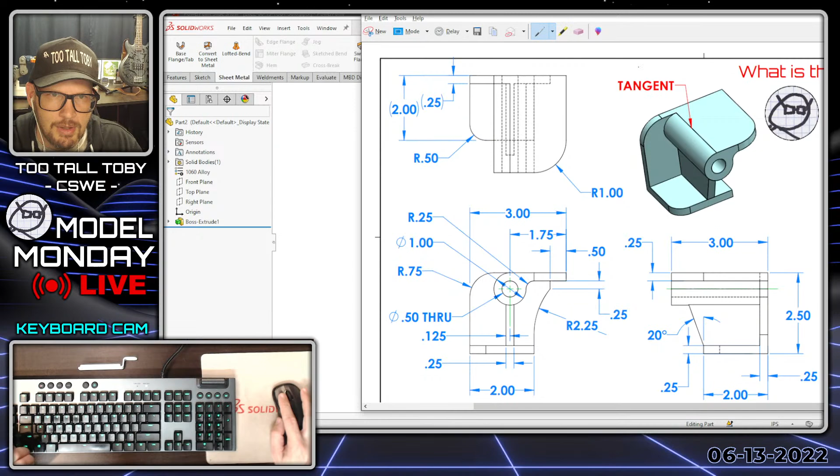Now, at this point, to help me remain oriented as I'm looking at the challenge, I might choose to add this cut just to set myself up so I can see what I'm working on. I think it'll help me maintain my orientation with regards to this design.

So to create that geometry, I could come down here at the wall thickness up top, which is 0.25 again, come over whatever that gap distance is, which is 0.5, come straight down 0.25 again. Now I'm going to get into this arc—to create it, I'll actually start at the bottom and come up a little bit, then come back, touch the end point, and create that arc. That arc has a radius of 2.25.

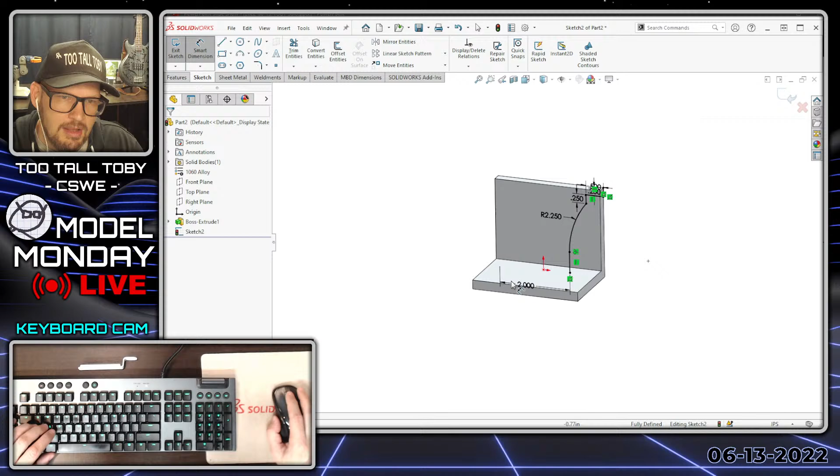And then finally, I've got an overall width dimension here of 2 inches. We can see that fully defines the sketch, and so now from here we can jump into extrude cut and say through all in both directions.

And that's basically like a surface cut. The only thing you have to look out for is this arrow here, which is saying it's going to cut away everything on this side of the model, and that's not what we want. So we want to flip that arrow, and you can do that just by clicking on it. It flips side to cut, and there you can see you're able to cut away everything on that part of the model.

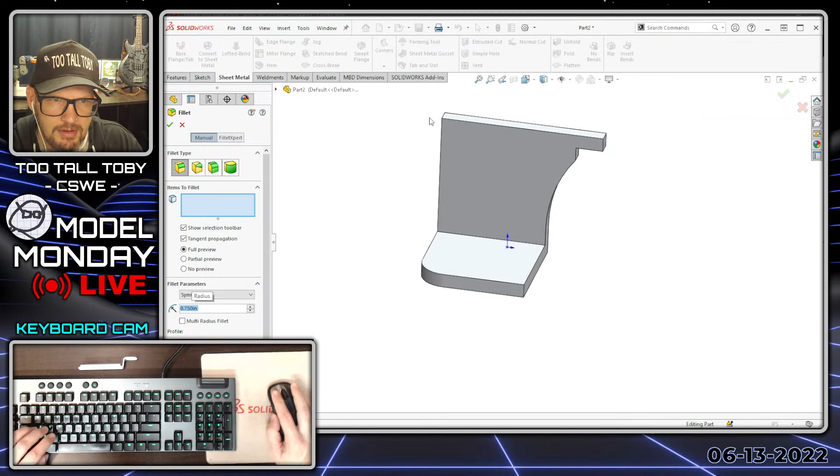So now from here, again, usually I save my fillets to the end, I save my cut extrudes to the end. If it's going to help me just to visualize what it is that I'm working on, I might choose to come in here and just put in these fillets, like a 0.5 fillet here and a fillet up here at 0.75. This is just to help me stay oriented relative to the model.

Now I've got the final challenge, which is to create that boss extrude that's coming out from the top. To create that boss extrude, I think what I would probably do is start with the circle. So we'll create this circle here, tangent to the top, with a diameter of 1 inch. So 1 inch, hit escape, hold control, pick one, pick the other, let go of control, make those tangent.

Now I'm going to create my distance off from the side. Again, it's at 1.75, which is to the origin, so that means I can just make this vertical, which makes things a little bit easier. And now I can extrude that out to the distance of 3 inches. So that gives me that circular shape up top.

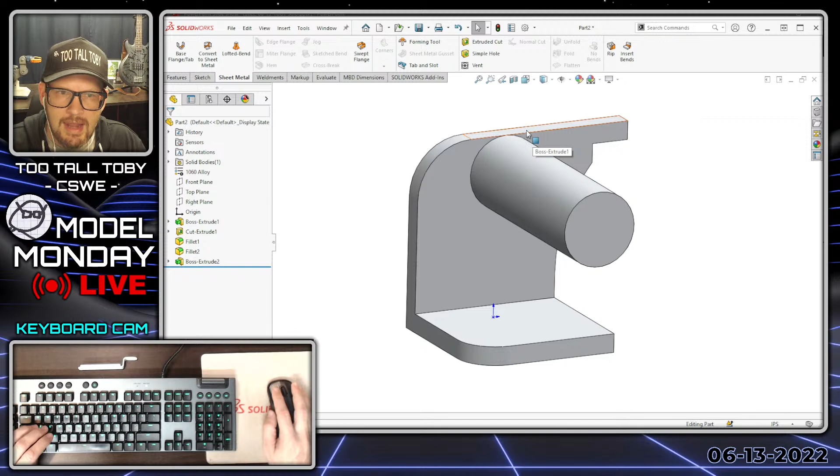And now I can come in here on this top face and create some of that other geometry, which looks like it's really just going to that same location. So that should just be something like this, right? Pretty simple.

Again, fillets, usually I do at the feature level. If for some reason you wanted to do it at the sketch level, you could do something like this. I personally would not do that. I would just do it at the feature level. That's always how I do it.

Oops, I bumped myself out of the sketch. And that's going to go to 0.25, I think. Yep, 0.25, reverse direction. There we go. And now for that inside fillet there, that's a radius of 0.25 as well. 0.25, and we hit this guy here.

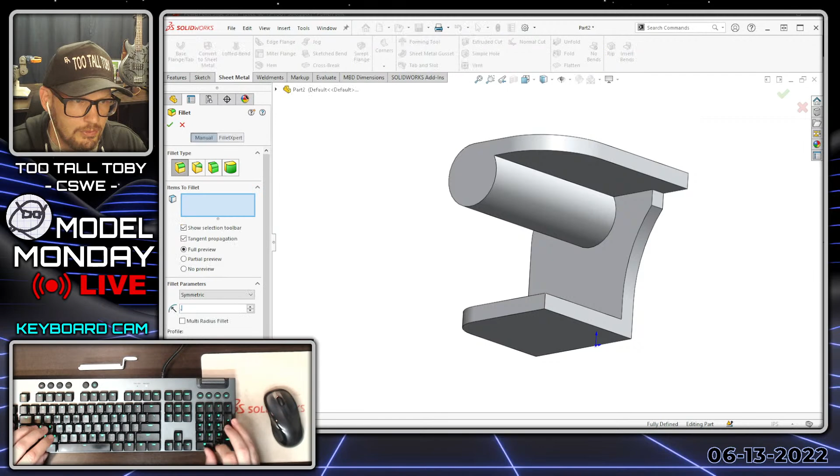And finally, we've got our, it's almost like a rib. It looks almost like a rib there. So what's nice is that we've got this plane that we created to begin with. It makes it really easy for us to sketch our geometry in the right location because we've got that center plane going down the whole model.

So we could create a line here that comes over, comes up to this location, exactly on the front of the model. This is going to probably be a pierce relation. Oh, no, I'm sorry, it doesn't go up to the model, it's got an angle dimension. So angle from here to here, that's going to be at an angle of 20.

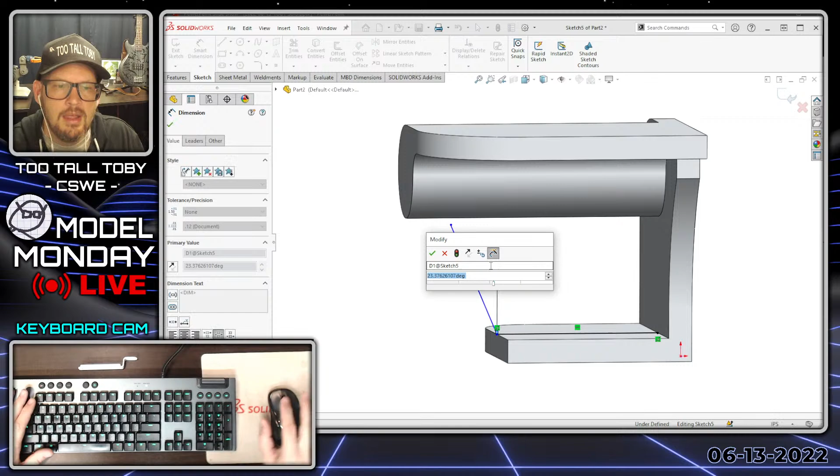One thing you can also do in this spot, a lot of times people forget about this, but there are times when it's pretty useful. You could go smart dimension from here to this line, but you can also just click on the endpoint of your sketch line. That gives you these invisible arrows, like an invisible anchor for an angle dimension, and then you can click there and say 20 as well. So you can go to this vertical line, but if there's ever a spot where you don't have the vertical line, it's good to know that you can get away with that.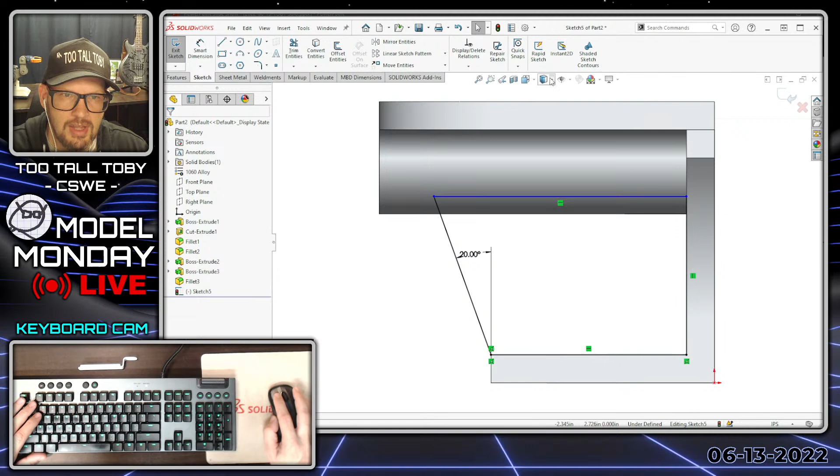This should be coincident to that endpoint. And then for this guy here, what should be the location of that top line? One thing you could do in that spot is view temporary axes and then just make it collinear here. There's nothing wrong with it running all the way up to the center of the model, because you're going to blast through there with that cut extrude in a moment anyway. So for the whole, this is going to be mid plane at a depth of 0.25.

And then we just finish up here with that hole. I think that's the whole model. So this face, you're going to sketch, orient the view, S key, circle, wake up the center point, pick this circle here. Diameter of 0.5, through, S key, extrude cut, right mouse button, through all, right mouse button.

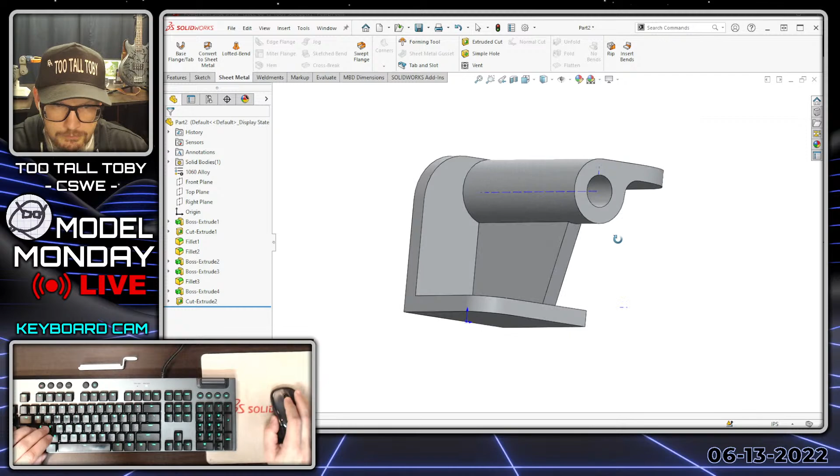So that's that model. It's a good example of trying to think through a model, trying to decide where the starting plane, starting profile should be. And we saw that we were really able to save a lot of time by picking this as our starting plane. That gave us the perfect starting point for this rib feature here. It gave us the perfect location for the center of this hole here. I think it just really made it easy for us to get in there and to create that geometry.

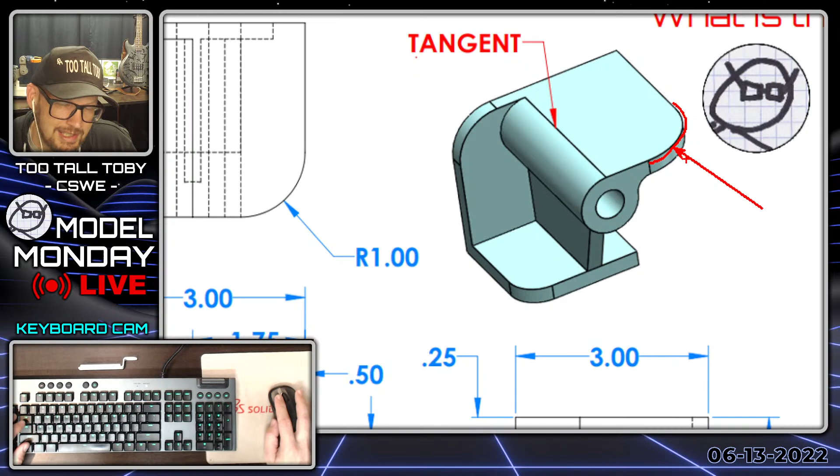And we saw, kind of thinking through some of the other features, some things that I normally wouldn't do, I did in that example. Like normally I would save this feature for a fillet feature. The reason I do that is it's just a cleaner way to model. You model everything with sharp corners and then you add your fillets at the end. In this case, I did do my fillets earlier, so I certainly could maybe just move these down to the bottom of the tree to make things a little bit more tidy as far as the fillets go.

And then when it comes to renaming your features, you don't want to name the fillets necessarily based on their radius. I try to avoid that because it's not a dynamic link, and instead I'll name it just based on where it's located. So this will be called like fillet front lower corner, something like that. I think is a better name than, like, fillet radius 5, because then if that radius changes, you're in trouble. But you know that this is always the front lower corner fillet.

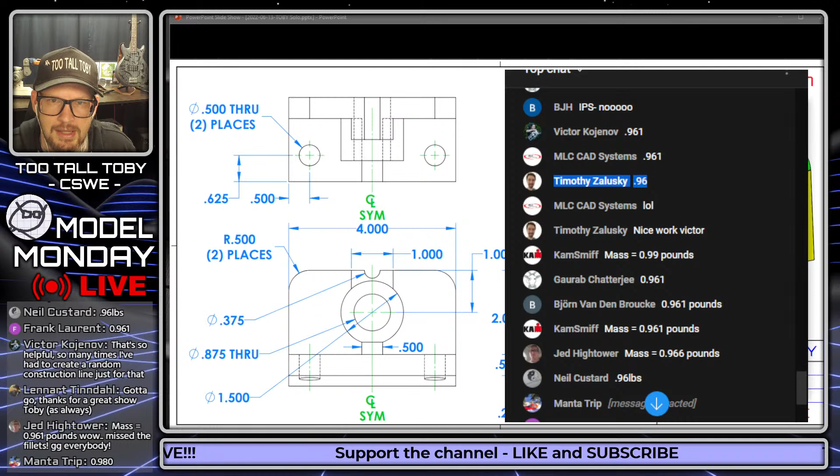So let's see here. I saw some answers coming in pretty early. Victor got in here right away, 0.961. Nicely done, Victor. MLC CAD right behind him, 0.961. We got Tim Z coming in 0.96. He says, I don't care if it says 3 place, I'm just going to do it as 2 place. That's just how I roll.

We got KamSmiff coming in 0.99, Gaurab coming in 0.961, Bjorn coming in 961, Cam revising to 0.961, Jed Hightower 0.966. He's going for that extra little 0.005 pounds. Neil coming in here 0.96, nicely done. Frank coming in 0.961, and Victor said that was very helpful, I've had to do construction lines before for that. Yep, for sure. And Jed revising 0.961, and Manta coming in here with 0.980.

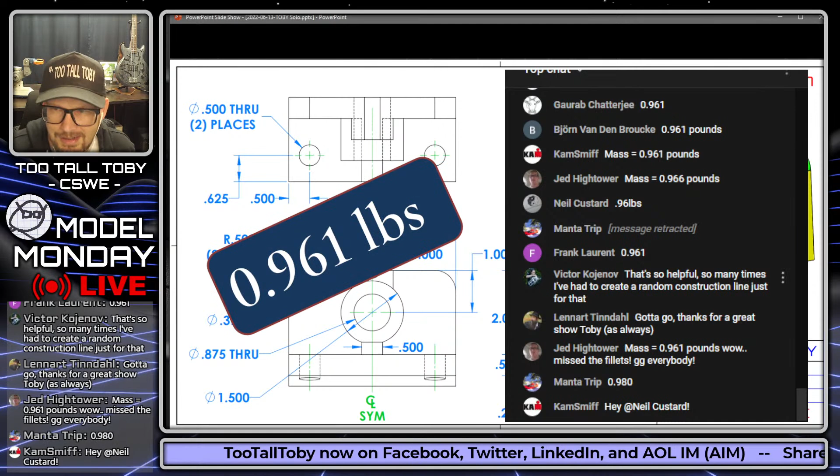Cool. Well, very nicely done to everyone. Let's see what the correct answer is. The correct answer is 0.961. So I think that one's going to go to Victor. So let's be sure to give Victor a GG in the chat. Very nicely done, Victor. Congratulations to all of our winners today.